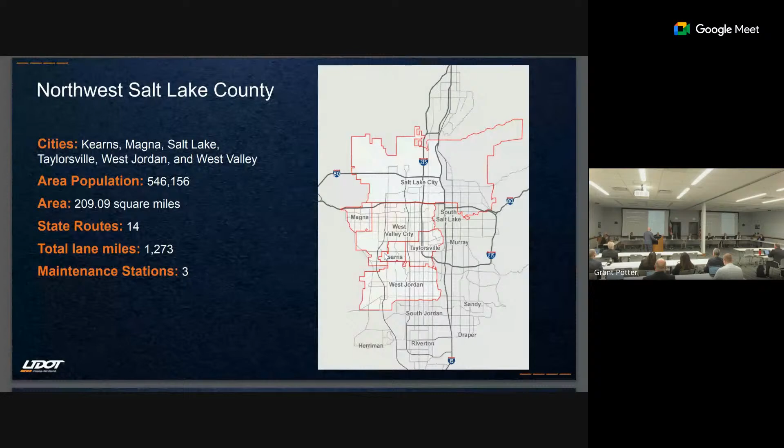These areas drive growth with that towards needing a north-south connection towards the downtown area, which you've heard from West Valley City is why there's emphasis being put on Mountain View Corridor and Bangerter Highway.

I want to talk about some of the things the department's been doing over the last 3 years to try to help facilitate keeping our assets in good condition, as well as improving some of those capacity issues that are in this area.

This project was really important to me because I was receiving quite a few click-and-fixes as a region about some of the challenges our residents have driving through the section. It's also the gateway to our state - when coming out of the airport and coming into Salt Lake, you're passing over all of these bridges that were in a bit of a rough condition at the time.

So the project repaired 19 structures, where those structures had pothole patching, overlay treatments, and joint sealing performed on them. This was completed last year for $9.6 million, and the intent of this was to improve the ride and improve our asset life.

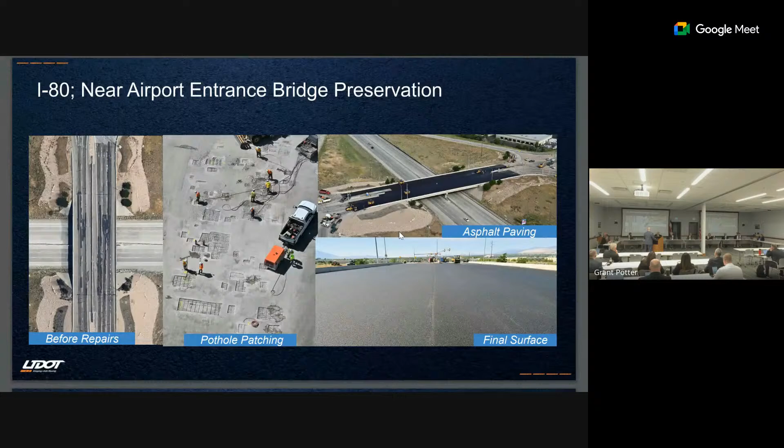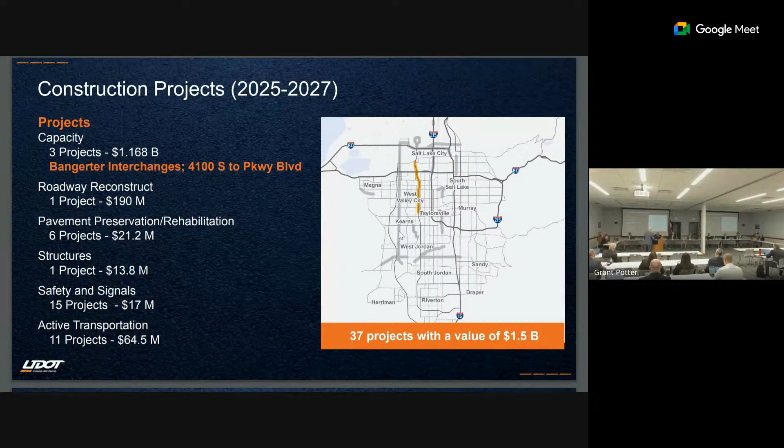The one I want to highlight to you is one of the large capacity projects that are going to be happening. That project is Bangerter Highway interchanges from 41st South to Parkway Boulevard.

So this is the next segment of Bangerter. Yesterday on the tour, we got to see 47th under construction right now. This is that continuation northward of creating that interchange style grade separation, at 41st, 35th, 31st, and Parkway Boulevard. This does have the environmental complete, and they're starting to procure right-of-way for this project as we start getting ready for design and construction in 2027.

The importance of this project, as you heard from West Valley City, is that right now Bangerter Highway can be somewhat of a stop to their east-west connections because of the priority that gets put onto Bangerter Highway. So by separating these facilities, we're going to not only improve traffic and safety along Bangerter Highway, but also improve the east-west connection because more time can be given to those travelers going east-west as mobility also goes north-south. Once completed, this would complete a connection all the way from Parkway Boulevard down to I-15, creating a freeway from that point at free flow.

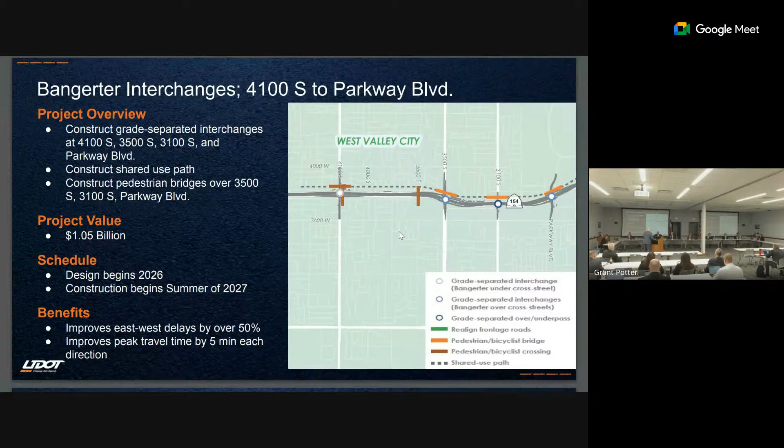But that is just part of the process. There's still more to go on Bangerter Highway - that's just getting us to Parkway, not finishing the whole stretch. So I want to talk about some of the constraints in this area that make it a bit challenging on the network.

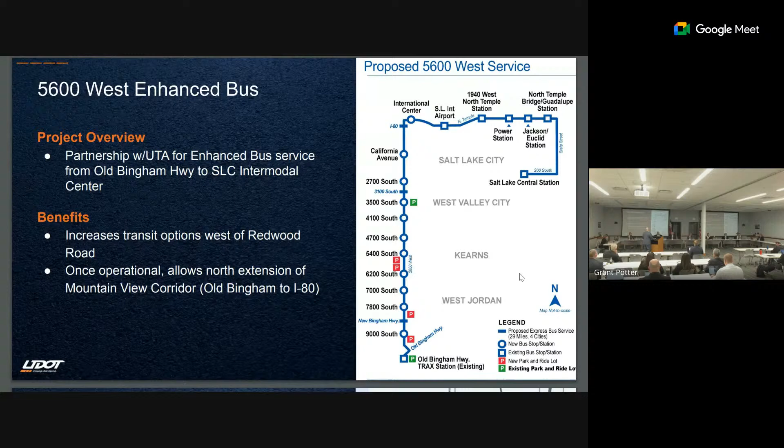Like I said before, West Valley and us see this as a great opportunity to improve safety along the corridor by separating those east-west movements from north-south, allowing free flow for traffic and creating a second ring route besides Bangerter Highway and I-15. The importance to us is trying to find alternatives to I-15. Yesterday was a great example of when something happens on I-15, there aren't a lot of great routes to get around that carry that amount of traffic. So completing Bangerter Highway and Mountain View Corridor becomes even more important to us as a region to help with that mobility.

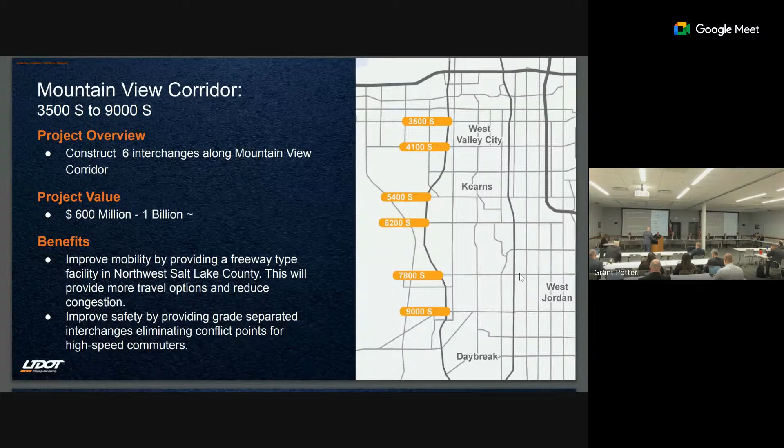So with that, this is what we have planned over the next future needs that we're pushing as a region as our importance. But I also want to let Jeff talk to you guys about what we're doing for planning studies, and what future things we'd like to accomplish. So I'll turn the time over to Jeff.

Good morning, Commissioners. Jeff Dupay, Region 2 Planner.

As part of our tour, we talked about the Northwest Quadrant. We had the Inland Port representatives speak to us about this area. As Kendall mentioned, there are additional connections somewhat competing with each other in the same area. You've got geographical and topographical constraints with the tailings pond on the west. We also have a lot of rail in this same area along with the interstate. There are many transportation connections they're coordinating with our staff on, trying to make this area as viable as possible economically, so it can be productive not only for trucking but also for rail, as well as bringing in those wider body jets to hopefully increase air freight opportunities.

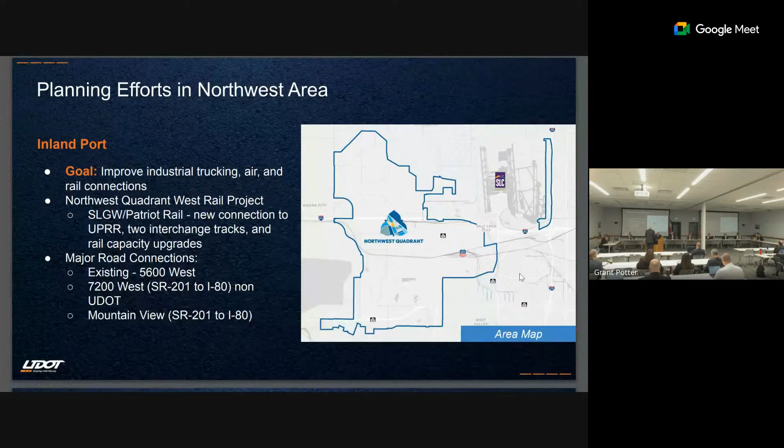One of the other areas just outside the West Valley area is also the Power District that we're working on, a partnership with Wasatch Front Regional Council, Salt Lake City, the Larry Miller Group, and UTA.

One of the challenges we have in Salt Lake County that some other locations don't have as big of a challenge is trying to retrofit various transportation elements within the community. So with redevelopment, we're trying to work together to figure out how we can best utilize or maximize the use of the existing transportation system, to make it more user-friendly, not just to vehicles and rail, but to all users. That includes bikes, additional pedestrian crossings, so that as these areas redevelop they become more assets to the entire community, not just those who may want to or need to interact with those areas.

This is a study currently going on within that Power District area, and we should have that study complete within the next several months. We're anticipating around a July-August timeframe to have some recommendations from that study. In addition, we're also working individually with the communities of West Valley, Magna, and West Jordan on their various active transportation elements, trying to make sure we're incorporating some of those additional connections into our existing transportation network.

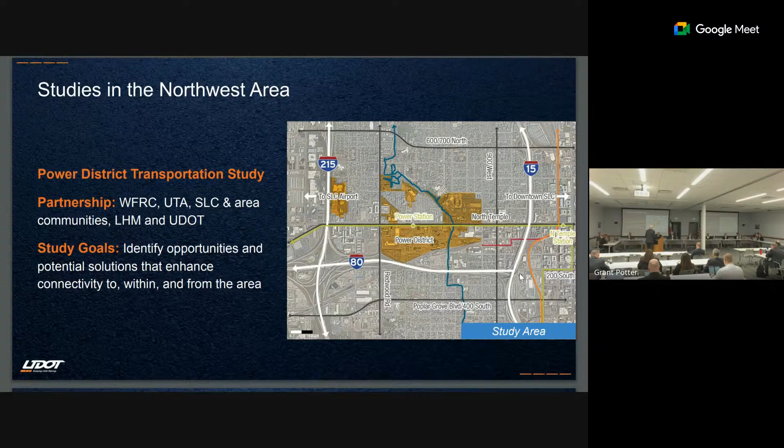And with that, are there any questions?

After the tour yesterday, it was amazing to see how dense and urbanized the western part of the county is, just to see it visually. I looked up the numbers afterwards. Our state is 90% urban, and the urban population takes up only 1.1% of the state's land area. Compared to other states, depending if you include DC, we're the 6th or 7th most urban state in the country. So pretty interesting.

We congregate along these mountains. And Mr. Chair, to Commissioner Gochner's point, our urbanization is increasing much faster than other areas, because only 5 years ago we were number 8th in the country, then we were number 7th. This is the first I've heard we're now number 6 in this area.

Part of it is 65% of this state is owned by the federal government. And when you look at our geography, we have very little land. About 25% actually is available for the public to have businesses and live in. This presents a special challenge for transportation.

Okay. Any other questions? Thank you, Jeff. Thank you.

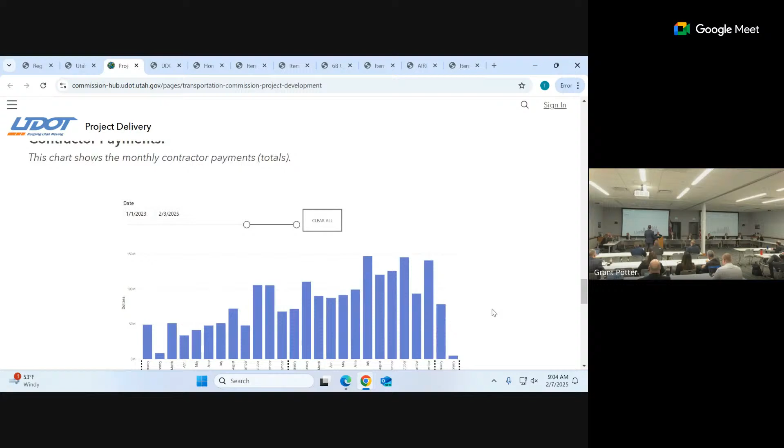And then this is just showing the payments again. You always know that we're going to be low this time of year, but if you look year over year, you can see January to January to January, that number just continues to go up. So consistent with what we know about our program.

It's as big as it's ever been and a lot of work out there. Any questions from me? Josh, can you please go to the first chart? You had the engineer's estimate versus the contractor. This one here, right at the beginning. Know the numbers, go to... let's see... you want this one? Right there.

From the corner of my eyes, I thought I saw the Vineyard project. They had a $4 million discrepancy between the estimate and cost. Where is Vineyard Overpass 7 to 11? And then, so why is that much of a difference? Anyone from Region 3 care to take that? The rest of the projects are all kind of very close, but that particular one is a $4 million discrepancy.

There's a local contribution that's going to be made to make up that difference. They added scope to that project. Okay, sorry, I'm Rob Clayton, I'm the Region 3 Director. Okay, well, thank you, that makes sense.

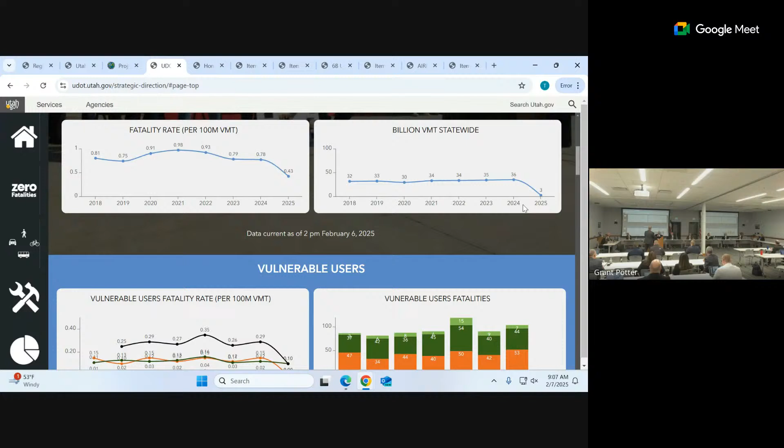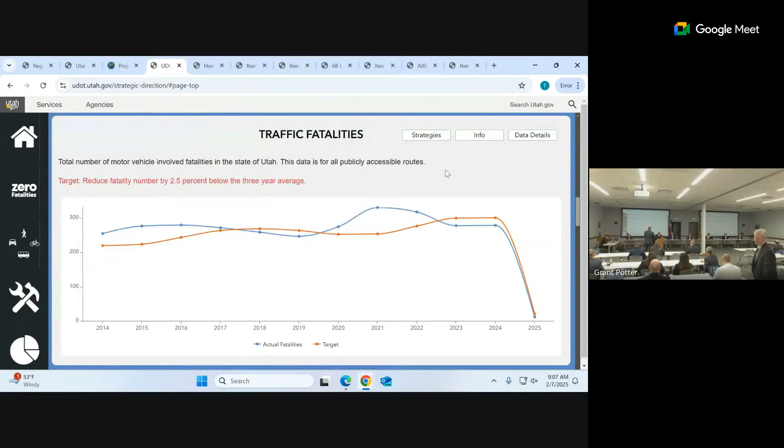Next item, I'll scroll down here just a moment and we'll talk about fatalities. We're currently sitting at 280 that finished out the year of 2024. I want to caution that number, we've reported that there are still a few crash records that we haven't received in terms of needing to get to the death certificates on some of those. So that may drive that number up a little bit or down. There's about 20 or so of those that we're still waiting to come in, but we're pretty confident we're going to be right around that number.

For 2025, we're currently sitting at 13 fatalities for the year, which if you remember this orange line is our reduction target. We use 2.5%, we take 3 prior years, average those, and reduce that by 2.5%. For where we are today, our target reduction is at 22, and you can see we're at 13, so we're about 40-41% below that target, which I would love for that trend to stay throughout the year.

Let me scroll up. As part of that, let me step back on our vulnerable users. There's a new graph here on vulnerable users. You can see that we're tracking - the orange is motorcycles, dark green is pedestrians, and light green is bicyclists. In 2024, we ended up with 53 motorcycle fatalities, 44 pedestrian, and 7 bicyclists, which accounts for about 37% of our total fatalities on the year.

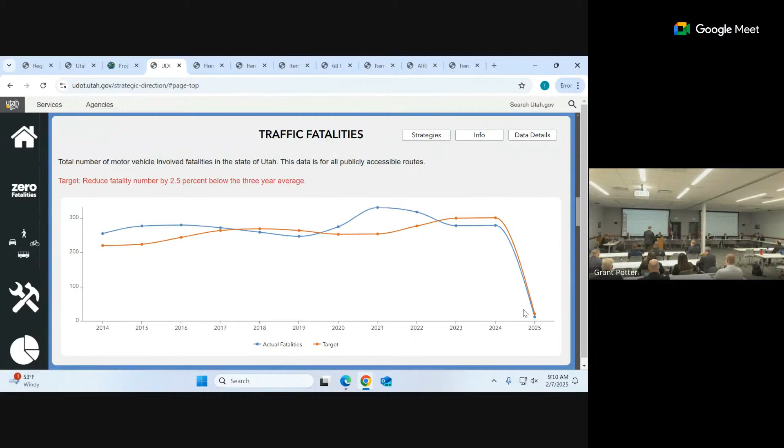Moving along, our suspected serious crashes for the year, we ended at 1,918, which was about 15% higher than our target reduction of 1,663.

I won't report on 2025 because there's a bit of a lag in getting the crash information in on total crashes and suspected serious crashes for the year. We generally trend about 1 to 2 months behind in getting that, so there's really not any data to report on suspected serious traffic injuries and traffic crashes yet.

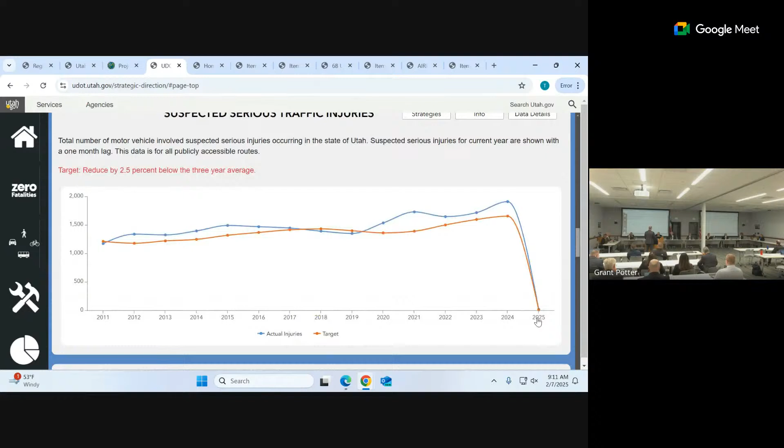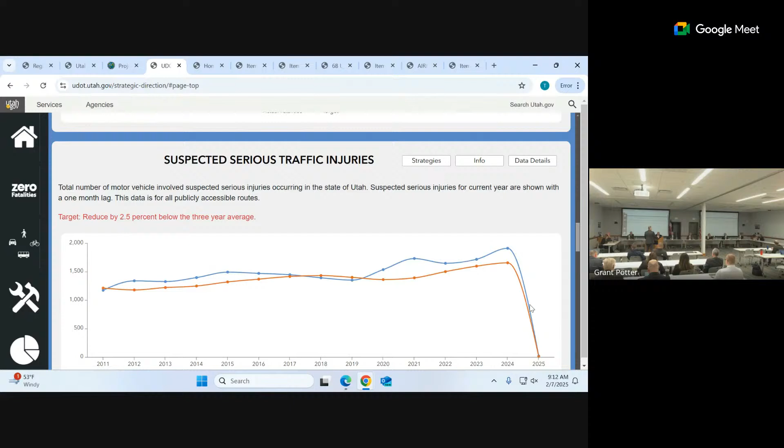I know we have some new individuals on the commission, so let me take a quick second to define what suspected serious traffic injuries are. When there's a serious accident, the police officer at the scene is making his best guess, saying this is a serious crash. The only way we follow up on those is if there's a fatality, so there's a time period where they follow up to find out the severity in which the crash ended up. That's where the classification suspected serious comes from—it's that initial thought process or analysis from the officer doing the investigation.

Total crashes for 2024, over 61,000, which is higher than our target reduction of 58,000.

Let's see, anything else? That does it for my update. But I do always like to remind everyone about the 5 safe driving behaviors: always wear a seatbelt, drive focused, calm, alert, and sober.

Any questions? On the motorcycle deaths, do we have a breakdown of where those occur—urban, rural? Do we separate that out? We have that information, I just don't have it with me today. Okay, because I'm curious, in the summertime we seem to have a lot in our rural areas.

Yeah, we had a spike from June through August on motorcycle fatalities. I forget the exact number during that time period, but it definitely contributed to that higher number through the year. Okay, thank you.

Question, go ahead. I'm new, so I'm asking lots of questions. I believe there's a bill in the legislature right now dealing with—I think most of us have had this experience—where you're stopped and a motorcycle is riding on the yellow line between cars to get up in front of everybody. Are we participating in that, Carlos, in some form? Is that anything we get involved in?

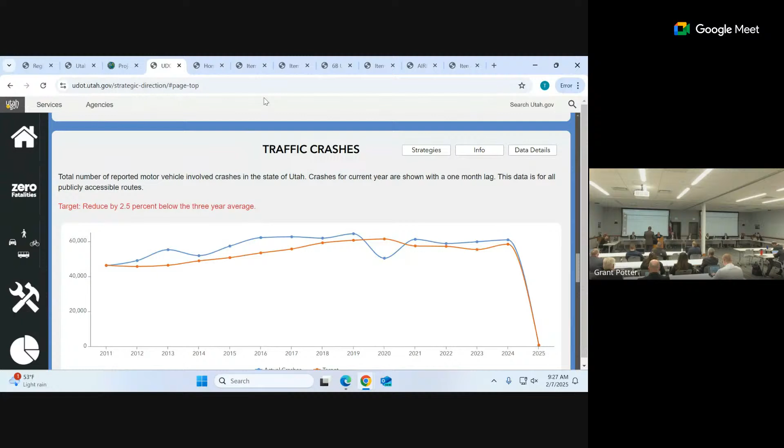Okay, item number 5 is consent agenda, and Ivan is coming to present that. Morning, Commission, Mr. Chair. Thank you, Tessie. Oh, thanks, Grant. Okay, all the way across the room. That's great. Item number 5 is our consent agenda.

Included in the consent agenda packet are the minutes for the December 13th, 2024 Transportation Commission meeting and a list of projects. These projects included in the exhibit have either been awarded, identified to have budget amounts that can be recovered, or are in the closeout process and have funding available to remove and reprogram. So in our packet we have the commission meeting minutes, the report on the December 13th meeting, actions taken, and then our projects returning funding, due to award, budget recovery, and project closeout. Do you see that beautiful $34 million there in savings?

A request today is a motion to approve the consent agenda items as presented. So moved. Thank you. Second. There's a motion and a second. Any questions, comments? Seeing none, all in favor say aye. Aye. Any opposed? Consent agenda is approved.

Thank you. Moving to item 6A. Sorry, yes, Ivan—Mr. Chairman, who was our second on that? Thank you. Our next item, moving to the programming item 6A-1.

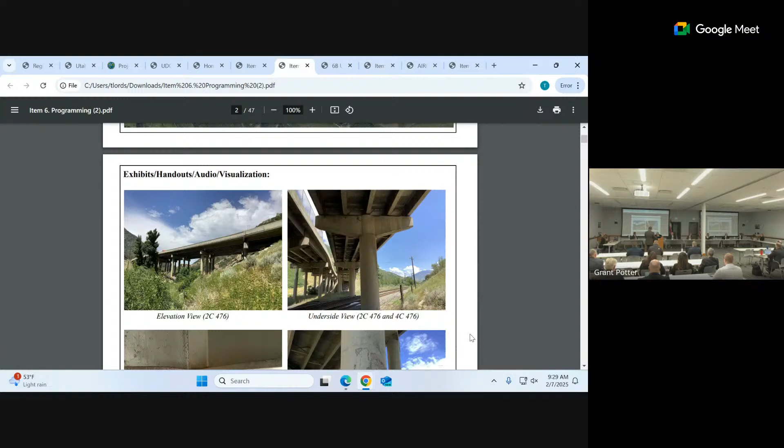Some of the damage seen on the structures. Our request today is a motion to approve adding funds to the I-84 Weber River and UPRR Bridge Replacement Project as detailed.

Thank you, I'll second. There's a motion and a second. Any comments or questions? I was looking forward to maybe just one summer where the Morgan up through Weber County would not have anything going on, but I really know we need these bridges, so I guess I'll wait again next time I go up there. Yeah, I'm excited. Thank you. Well, good.

With that, all in favor say aye. Aye. Any opposed? Item 6A-1 is approved.

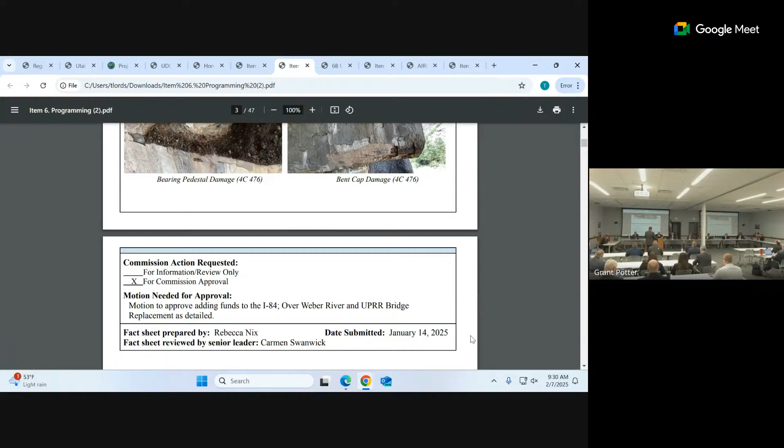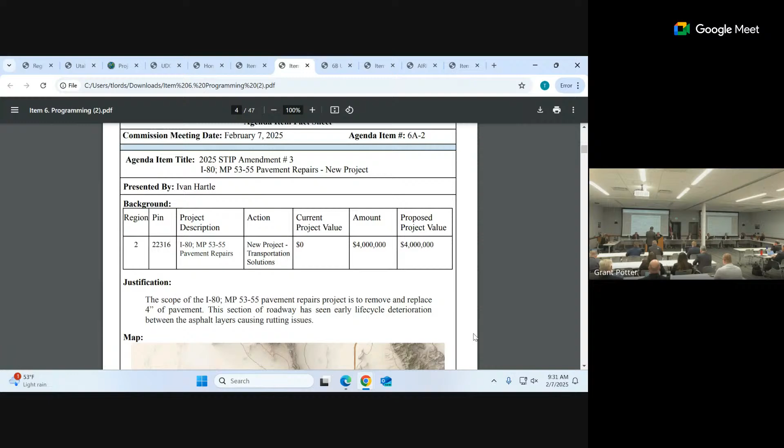6A-2, the I-80 milepost 53 to 55 pavement repairs. This is a new project in Region 2 from our Transportation Solutions program for $4 million. The scope is to remove and replace 4 inches of pavement. This section of roadway has seen early life cycle deterioration between the asphalt layers, causing rutting issues. Located here on our map, I-80, west part of the state.

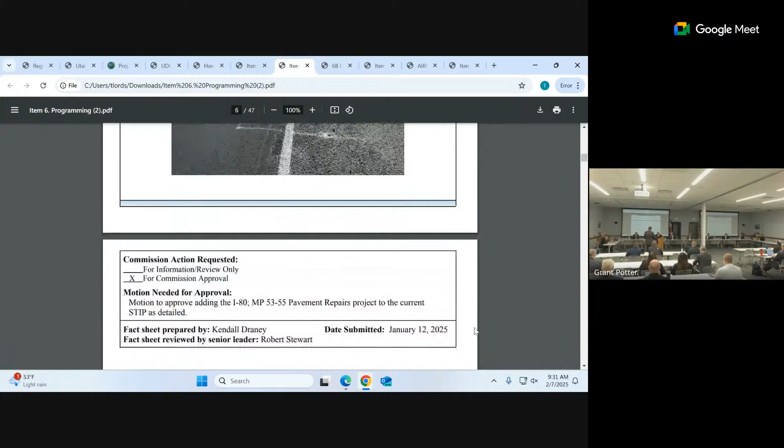Some of the pictures of the asphalt show rutting and separation. Our request today is a motion to approve adding the I-80 milepost 53 to 55 pavement repair project to the current STIP as detailed.

I'll make that motion, but I'd like you to go look at First South by the University of Utah as well. Okay. Second? There's a motion and a second. Any other comments or questions? Seeing none, all in favor say aye. Aye. Any opposed? 6A-2 is approved, thank you.

Next item, 6A-3, the Tooele County Sound Wall Trail, SR 138 to Village Boulevard. This is a scope change and would result in a name change as well, with no funding adjustment. The scope is to build a trail from Village Boulevard to SR 138, which is Pole Canyon Road.

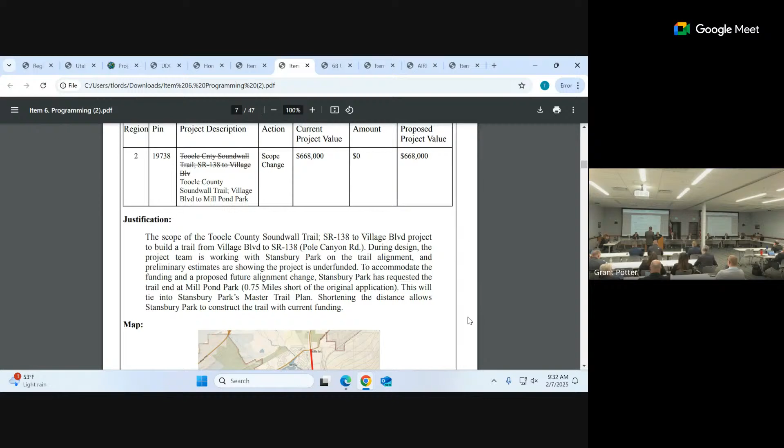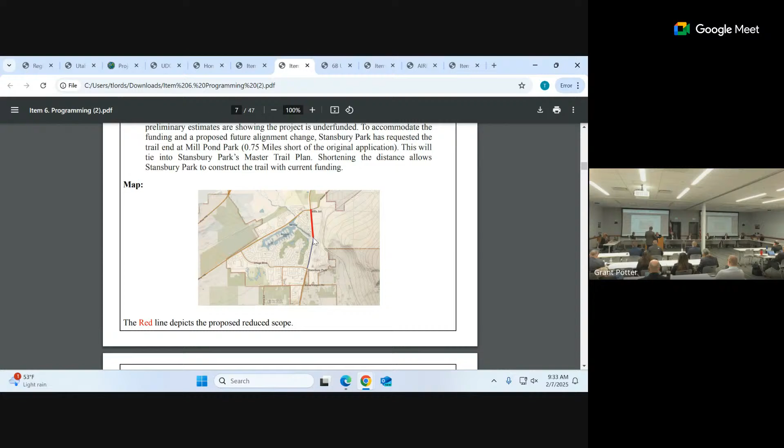During design, the project team is working with Stansbury Park on the trail alignment, and preliminary estimates show the project is underfunded. To accommodate the funding and a proposed future alignment change, Stansbury Park has requested the trail end at Mill Pond Park, about 3/4 of a mile short of the original application. This will tie into Stansbury Park's master trail plan, shortening the distance and allowing construction within the current funding. Located here on our map around Stansbury Park, this red line runs from Stansbury Park to Mill Pond Park Road, where the trail will end. This is the original scope included.

Our request today is a motion to approve adjusting project limits to the Tooele County Sound Wall Trail, Village Boulevard to Mill Pond Park project as detailed.

I'll make that motion. Okay, there's a motion and a second. Other questions or comments? Seeing none, all in favor say aye. Aye. Any opposed? 6A-3 is approved, thank you.

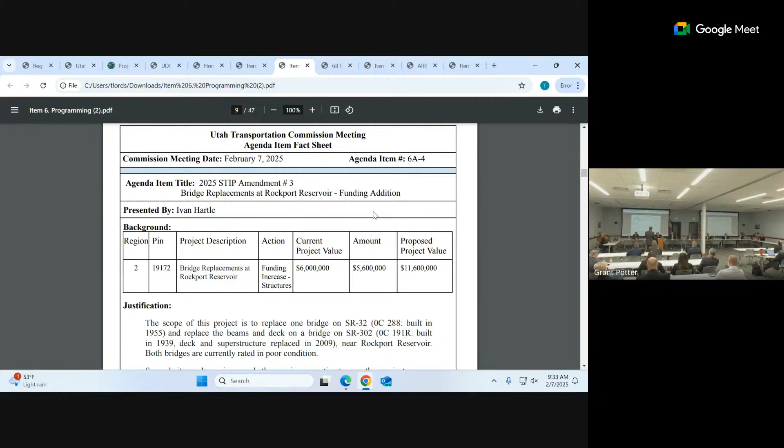Next item, 6A-4, the bridge replacements at Rockport Reservoir, a funding increase from our structures program. The scope is to replace one bridge on SR 32, built in 1955, and replace the beams and deck on the bridge on SR 302, built in 1939.

The deck and superstructure were replaced in 2009. Near Rockport Reservoir, both bridges are currently rated in poor condition. Several items have increased the engineer's estimate on this project scope. Additional funding is requested to address unanticipated utility conflicts, access concerns into Rockport State Park during construction, raising the road profile 5 feet to accommodate high water capacity needs, and changing the foundation type needed for the new bridge. Located here on our map on SR 32 and SR 302 near Rockport Reservoir.

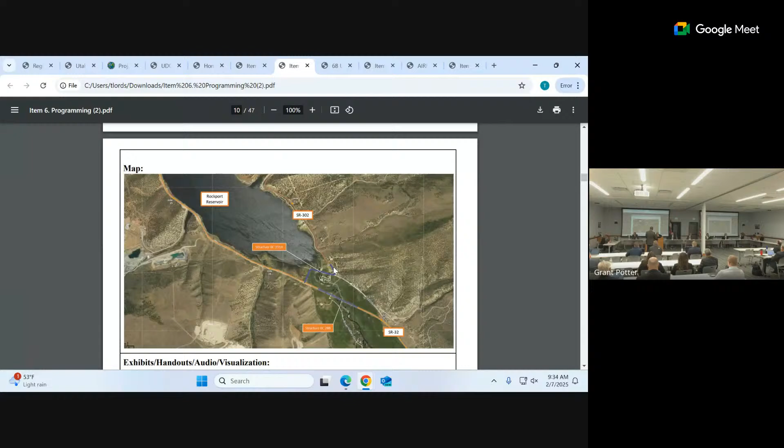Our request today is a motion to approve adding funding to the bridge replacements at Rockport Reservoir project as detailed. So moved. Thank you. Second? There's a motion and a second.

Any comments or questions? All in favor of this project, please say aye. Aye. Any opposed? 6A-4 is approved, thank you.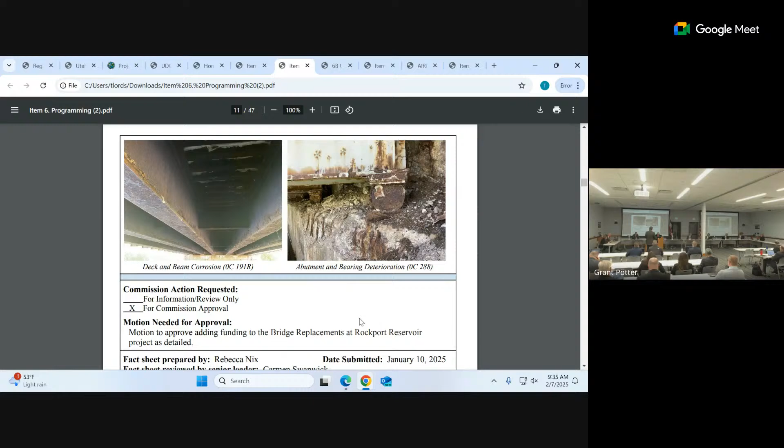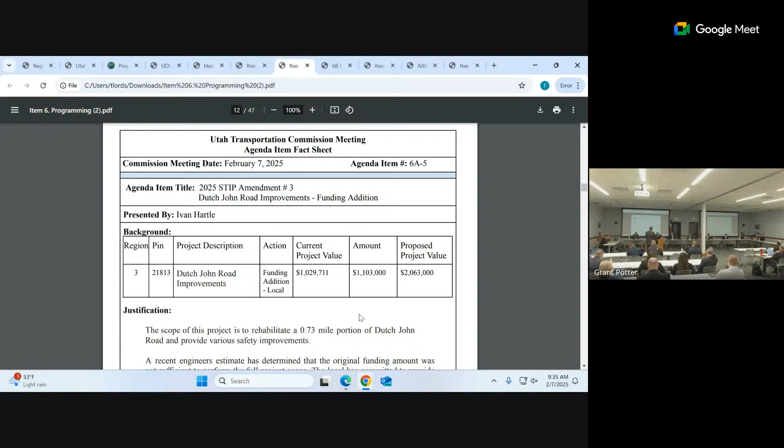Our next item, 6A-5, this is Dutch John Road Improvement, a funding addition from local funds. The scope of this project is to rehabilitate about 3/4 of a mile portion of the Dutch John Road and provide various safety improvements. A recent engineer's estimate determined the original funding amount was not sufficient to perform the full project scope. The local agency is committed to providing additional funding and is requesting approval to increase the project value. Located here on our map in Dutch John, near Flaming Gorge.

Additionally, as part of our packet, we have a letter from the town of Dutch John committing to that funding increase. Our request today is a motion to approve adding local funds to the Dutch John Road Improvement Project as detailed. I'll make a motion to approve.

Thank you, second. This is a road inside Dutch John itself, right? In the town, yes. Is it the one that connects to go down to the little hole? I do not know what it looks like.

Yes, Rob. Good morning, Rob Clayton. I believe you're correct, Commissioner. This is a mill and overlay project that the town has funded itself and just needed a little bit of extra funding to do what they intended to do, and they added a little bit to it. This is that main loop up around the back part of town. Yeah, it just goes, yes.

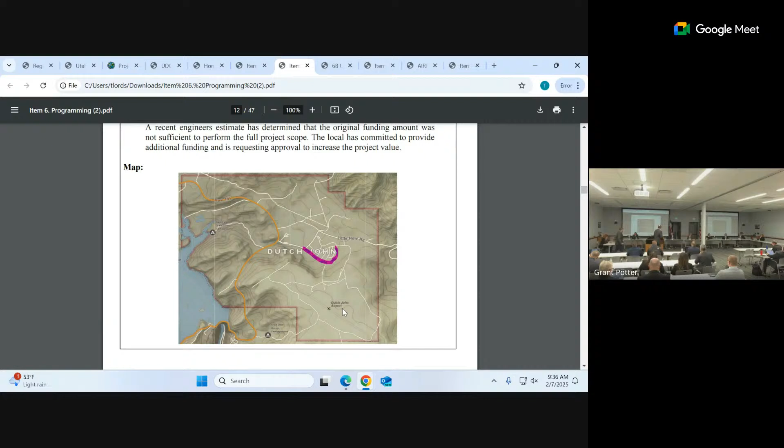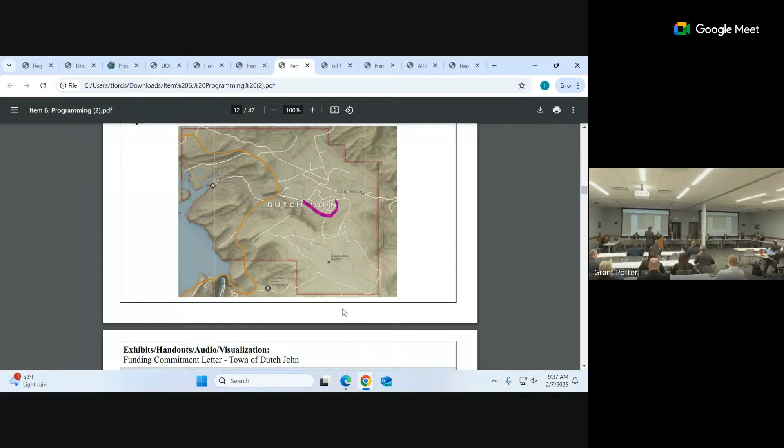For those of you who missed me yesterday, I was there in CIB to get this money appropriated for Dutch John, and also number 7 that you're going to see in the agenda. So it's coming from CIB. Thank you.

So we have a motion and a second. Any other questions, comments? Seeing none, all in favor say aye. Aye. Any opposed? Item 6A-5 is approved.

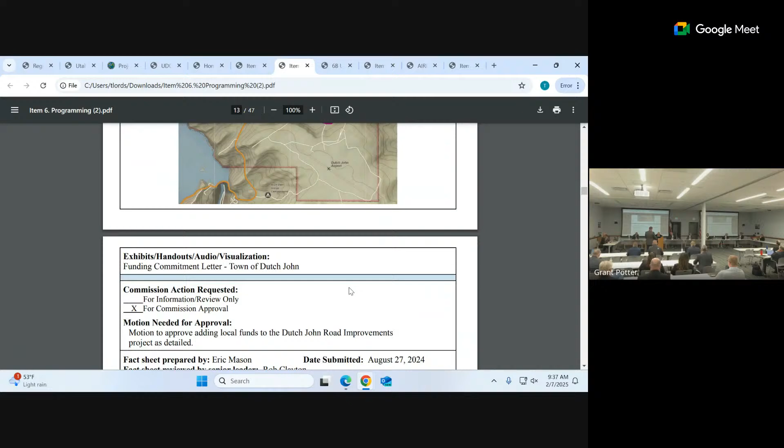Thank you. Our next item, 6A-6, is the I-15 Bridge Rehabilitation west of Levan. This is a funding addition and scope change from our Structures and Transportation Solutions program in Region 3. The scope of this project is to replace 2 bridges and repair 8 others to extend the life of I-15 west of Levan in Juab County.

These bridges were all constructed in 1984. The project is 11.6 miles long, located between milepost 210 and 222. The project will also repair the associated wing walls, abutments, parapets, and outdated safety hardware to meet current UDOT standards. The additional funding will be used to cover more extensive traffic control than was originally anticipated, including crossovers to be less impactful to I-15 traffic.

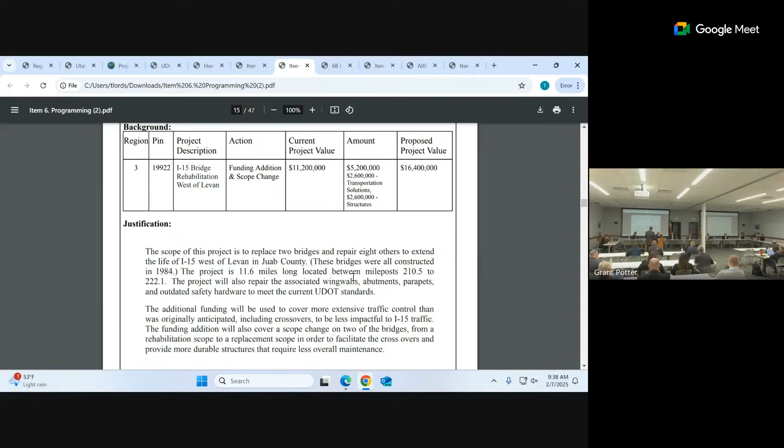The funding addition will also cover a scope change on 2 of the bridges from a rehabilitation scope to a replacement scope, in order to facilitate the crossovers and provide more durable structures that require less overall maintenance. They're located here on our map showing the structures along I-15 west of Levan, as well as pictures of the bridges themselves.

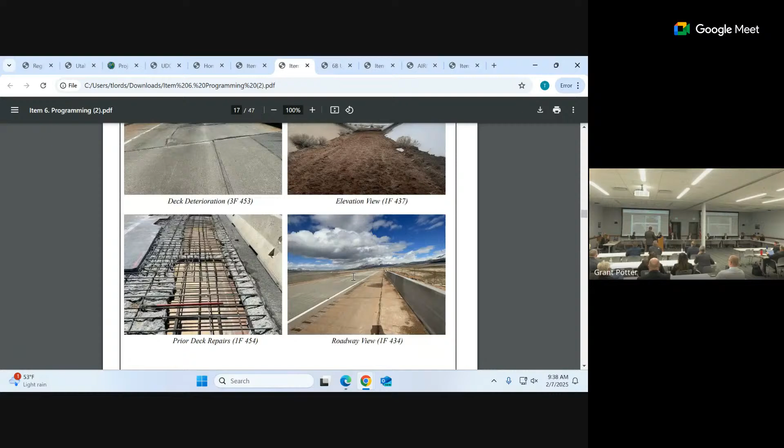Our request today is a motion to approve adding funding to the I-15 Bridge Rehabilitation west of Levan project as detailed. So moved. Thank you. Second. There's a motion and a second. I have a question. Maybe Becky can answer this.

So we had a bridge over the Rockport Reservoir built in 1955, and this one is 1984. What happens? That one lasted this long, and this one is just giving up. Any particular reason why this bridge is going so quick?

So this one was originally scoped out to just be a deck replacement on the bridge. In order to widen out the bridge and give enough room to provide the crossovers and allow traffic to maintain 2 lanes in each direction, we're replacing it with a smaller plate pipe structure. So the cost of replacement is just slightly higher than what the deck replacement would be, and it gives us a chance to have a lower maintenance structure in place.

So it's not necessarily condition driven that we're doing this replacement. Okay, it's condition of the deck, but more to facilitate the MOT and also reduce future maintenance. Okay, that makes sense. Thank you. Right, thank you.

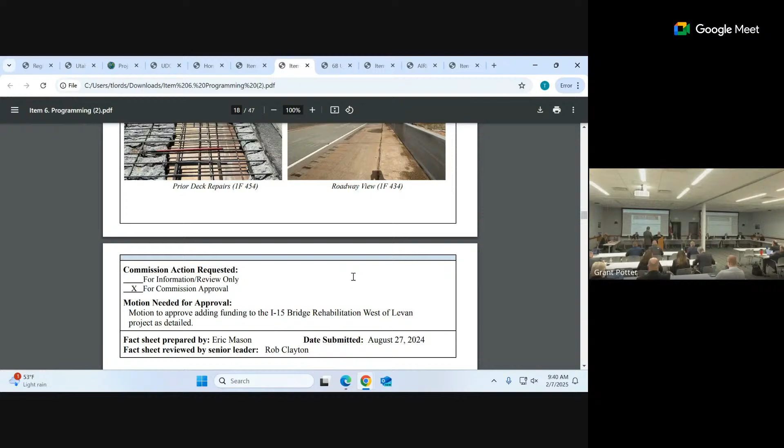Thank you. Our next item, 6A-7, this is the Myton Main Street. Also local funding being requested to add. The scope of this project is to rehabilitate the pavement on Myton Main Street. A recent engineer's estimate determined that the original funding amount was not sufficient to perform the full project scope.

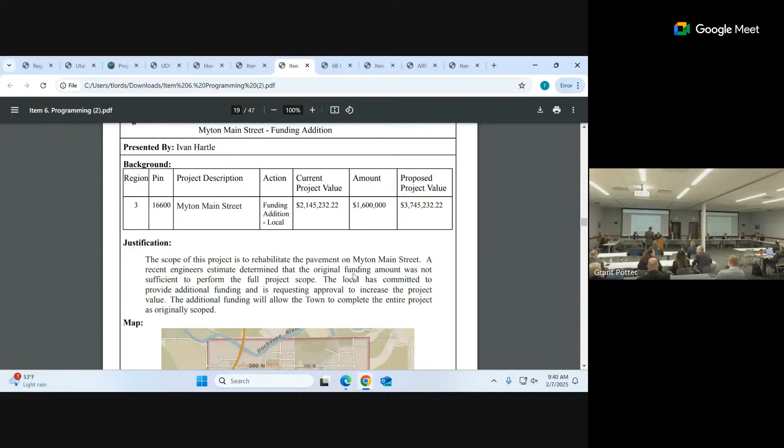The local is committed to provide additional funding and is requesting approval to increase the project value. The additional funding will allow the town to complete the entire project as originally scoped. So located here, town of Myton on Main Street.

Included in the packet is a letter from Myton committing to the funding they received through the CIB to add to this project. The request today is a motion to approve adding local funds to the Myton Main Street project as detailed.

Mr. Chairman, I move to approve. I'll second. There's a motion and a second. Any comment, questions? Seeing none, all in favor say aye. Aye. Any opposed? Item 6A-7 is approved. Thank you.

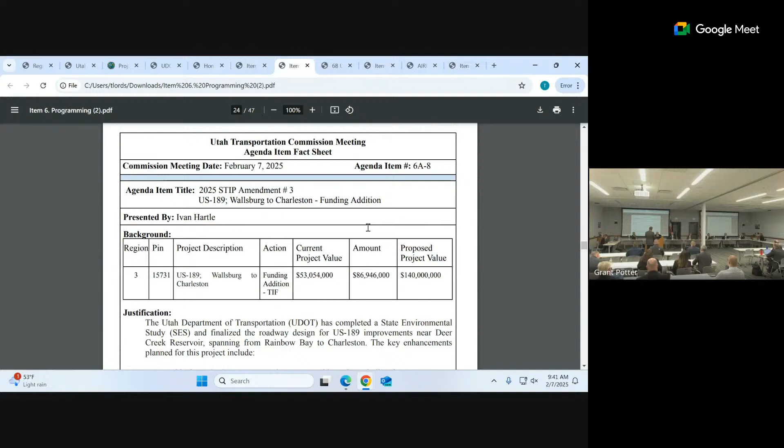Our next item, 6A-8, located on US 189, Wallsburg to Charleston. This is a funding addition from our TIF program. The Utah Department of Transportation has completed a state environmental study and finalized a roadway design for US 189 improvements near Deer Creek Reservoir, spanning from Rainbow Bay to Charleston.

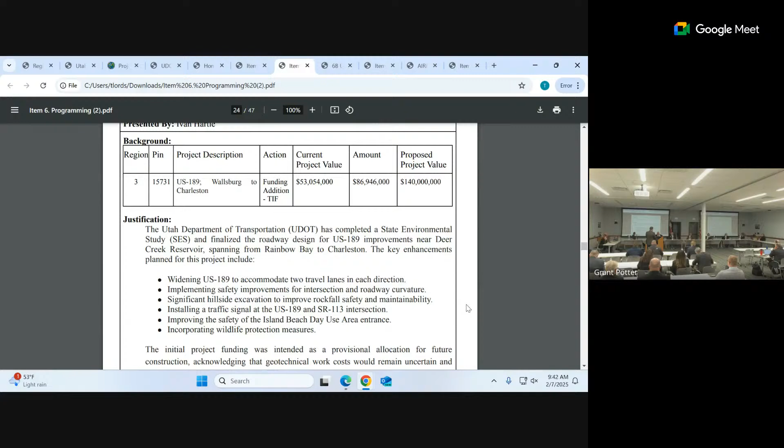The key enhancements planned for this project include widening US 189 to accommodate two travel lanes in each direction, implementing safety improvements for intersection and roadway curvature, significant hillside excavation to improve rockfall safety and maintainability, installing a traffic signal at the US 189 and SR 113 intersection, improving the safety of the Island Beach day use area entrance, and incorporating wildlife protection measures. The initial project funding was intended as a provisional allocation for future construction, acknowledging that geotechnical work costs would remain uncertain and impractical to estimate until the environmental review was completed and the alignment finished and finalized.

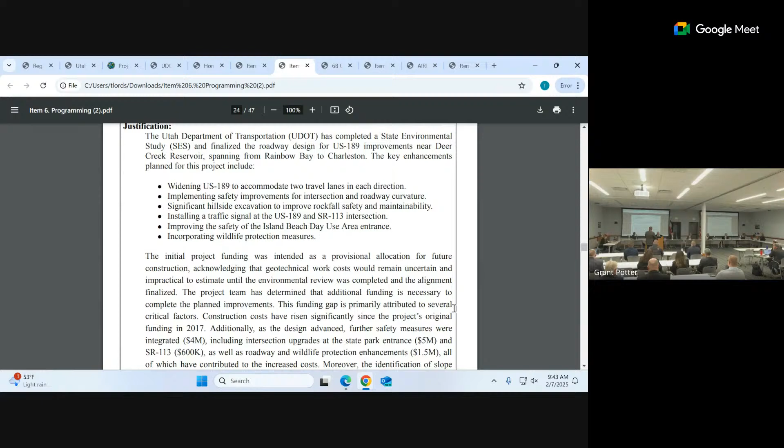The project team has determined the additional funding is necessary to complete the planned improvements. This funding gap is primarily attributed to several critical factors, including construction costs rising significantly since the project's original funding in 2017. Additionally, as the design advanced, further safety measures were integrated, approximately $4 million, including intersection upgrades at the state park entrance, which is $5 million, and SR 113, $600,000, as well as roadway and wildlife protection enhancements of about $1.5 million, all of which have contributed to these increased costs.

Moreover, the identification of slope stability issues during the design phase required slope treatment work, a little over $10 million, and the replacement of a bin wall, $500,000, further escalating the project's overall expenses.

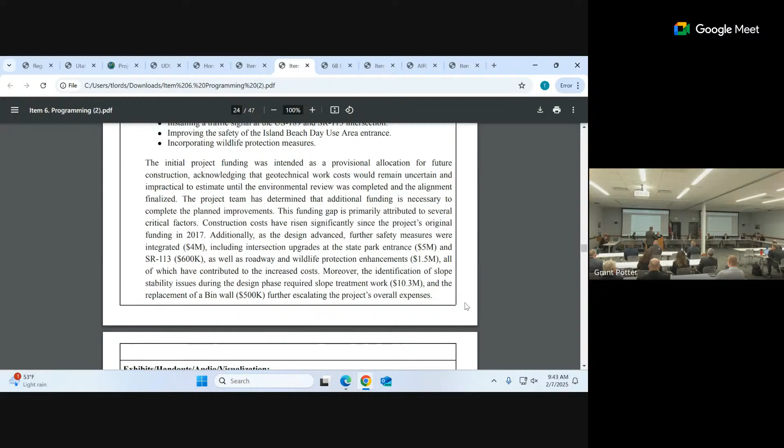Mr. Chair, I have a question. This is one of the things I've spoken about before, and I hate to be a broken record, but this is one we've approved the initial phase of. So we've already approved this once. Now we're coming back for additional funds to complete other aspects of this particular road. Why didn't we have all that information before we asked the first time, and get it close?

Because this is like a major addition, and having some experience in this, I see sometimes we get something out there, and it's almost like phasing on a building or planning a building, and then it kind of screws us into the next time - we have to do the rest of this building, even though we might have known it was going to include this in the previous estimation. I'm concerned sometimes we have to look at it to make sure that's not what's happening here. This one just confuses me a little bit on what we're doing.

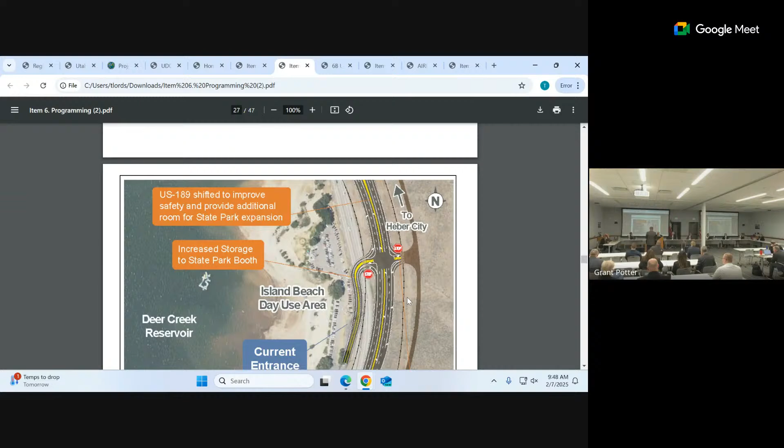Absolutely. And then we spent quite a bit of time working with state parks on the access to Deer Creek here. The day use has increased significantly through this area. It's a busy campground, busy recreation area. So we're trying to find a way to deliver a safe entrance and exit, because they're looking at options of actually increasing the state park on the other side of the road as well, so we needed to preserve that option. I won't say what I was thinking. I wish I had that discipline. Thank you.

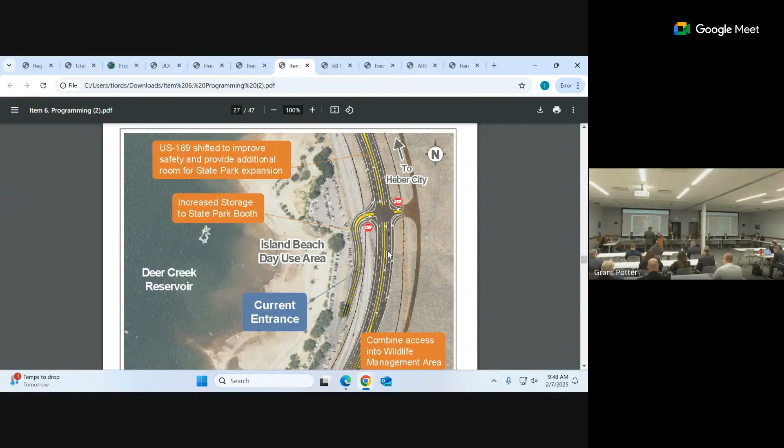So on that, here was some of the project map showing the wildlife access, the increase, or the proposed change to the island beach day use area. Our request today is a motion to approve adding funds to the US 189 Wallsburg to Charleston project as detailed. So moved. Motion and a second. Any other questions or comments? Seeing none, all in favor say aye. Aye. Any opposed? 6A-8 is approved. Thank you.

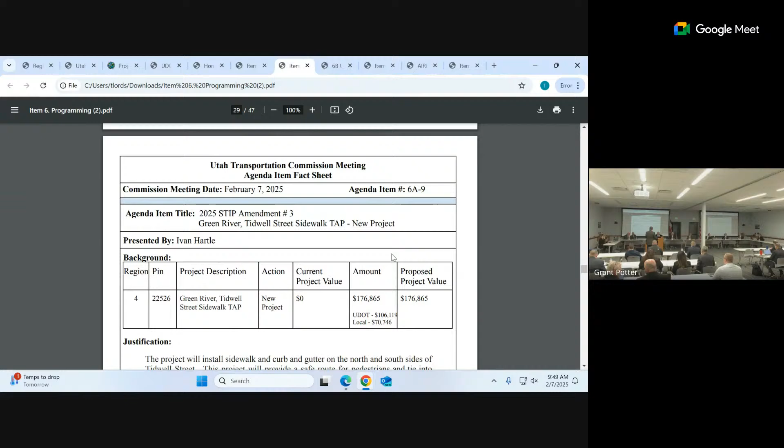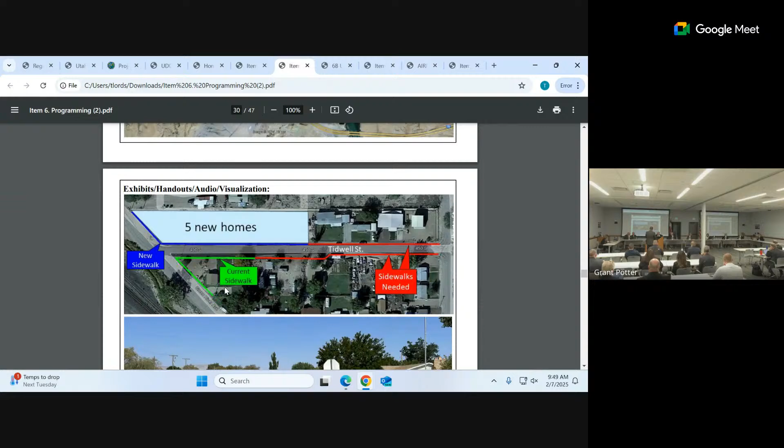Our next item, 6A-9, this is a new project in Green River from our Transportation Alternatives Program in Region 4. This project will install sidewalk and curb and gutter on the north and south sides of Tidwell Street, providing a safe route for pedestrians and tying into existing sidewalks in the area. Located here on the map in Green River, and then we have a zoom-in section of Tidwell Street. There's new sidewalk going in with the development. You can see where there's current sidewalk already installed at the corner, and then the sidewalks to be installed are shown in red here.

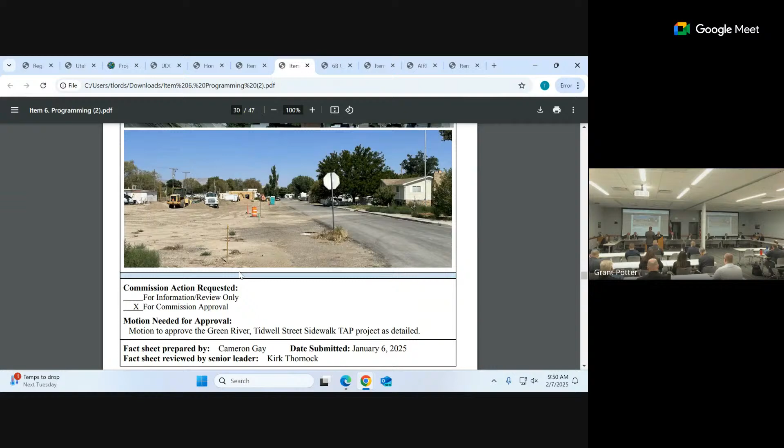Our request today is a motion to approve the Green River Tidwell Street Sidewalk TAP Project as detailed. I'll make that motion. I'll second it. It's a motion and a second. Any questions or comments? Seeing none, all in favor say aye. Aye. Any opposed? Item 6A-9 is approved.

Item 6A-10 is a funding addition from our Transportation Investment Fund on the Northern Corridor in Washington County. Recent decisions by federal government agencies, the BLM and U.S. Fish and Wildlife Services, have stopped the Northern Corridor project from moving forward. Legal representation and additional engineering expertise are needed to pursue reissuance of the UDOT road right-of-way alignment for the Northern Corridor. The additional funding will be used to cover expenses incurred by legal counsel, design, environmental work, and potential public involvement.

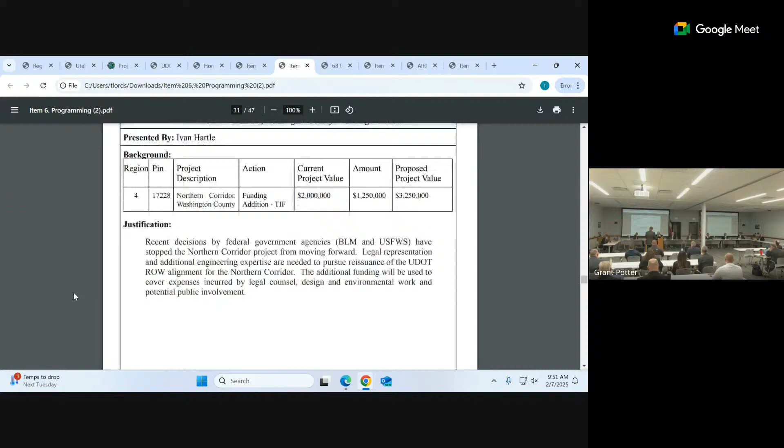Our request today is a motion to approve adding funding to the Northern Corridor Washington County project as detailed. So moved. Thank you. Second. It's a motion and a second.

6A11, the SR 14 milepost 12.5 to 17.2 overlay is a funding addition and scope change. The scope of the SR 14 project is from the Transportation Solutions Program in Region 4.

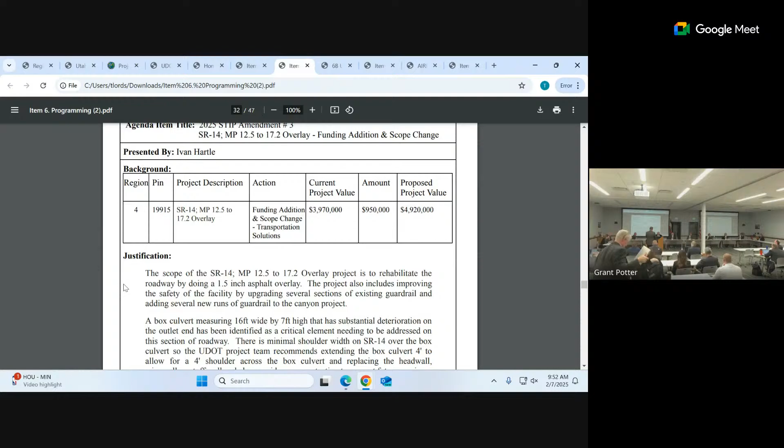The scope of the SR 14 milepost 12.5 to 17.2 overlay project is to rehabilitate the roadway with a 1.5 inch asphalt overlay. The project also includes improving safety by upgrading several sections of existing guardrail and adding several new runs of guardrail to the canyon project.

A box culvert measuring 16 feet wide by 7 feet high, with substantial deterioration on the outlet end, has been identified as a critical element needing to be addressed on this section of roadway.

There's minimal shoulder width on SR 14 over the box culvert. So the UDOT project team recommends extending the box culvert 4 feet to allow for a 4-foot shoulder across it, and replacing the head wall, wing walls, and cutoff walls, as well as providing scour protection to prevent future erosion. Located here on our map...

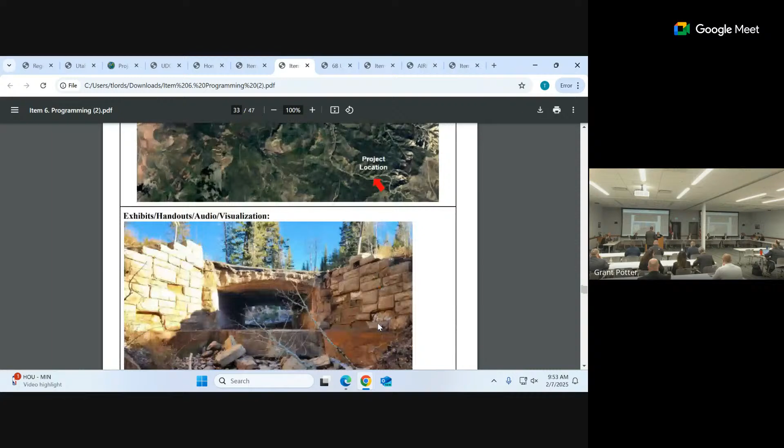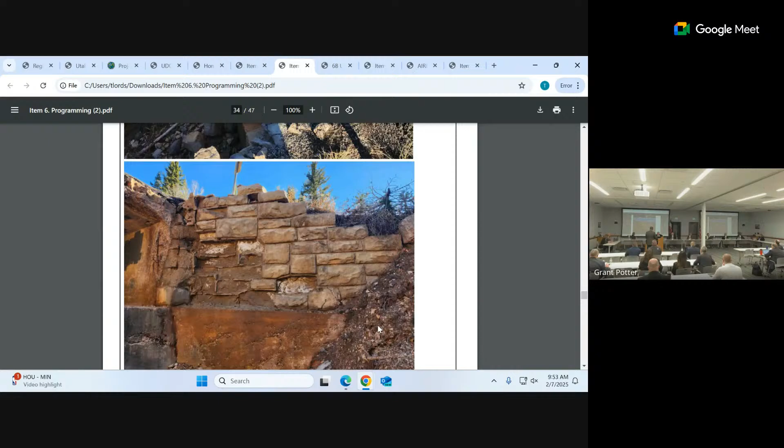Our request today is a motion to approve the SR 14 milepost 12.5 to 17.2 overlay funding addition and scope changes as detailed. I'll make that motion.

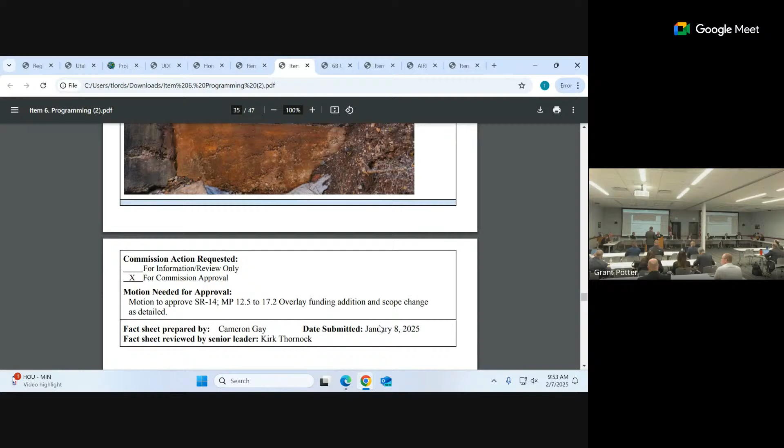Thank you. So motion and a second. Any questions, comments? Seeing none, all in favor say aye. Aye. Aye. Any opposed? Item 6A-11 is approved. Thank you.

6A12, SR 18 St. George Boulevard to Main Street, and SR 34 funding addition and scope change, coming from our Transportation Investment Fund as well as some St. George City funding.

The scope of the SR 18 St. George Boulevard to Main Street and SR 34 project includes widening to a 7-lane section from Tabernacle to 100 South, and an asphalt rehabilitation of the 5-lane section from 100 South to Main Street, with several new right turn and dual left turn pockets at key intersections.

The project includes a new storm drainage system, soil nail walls, retaining walls, and access control elements. Traffic modeling shows a 7-lane facility is needed from 100 South to Main Street around the year 2040.

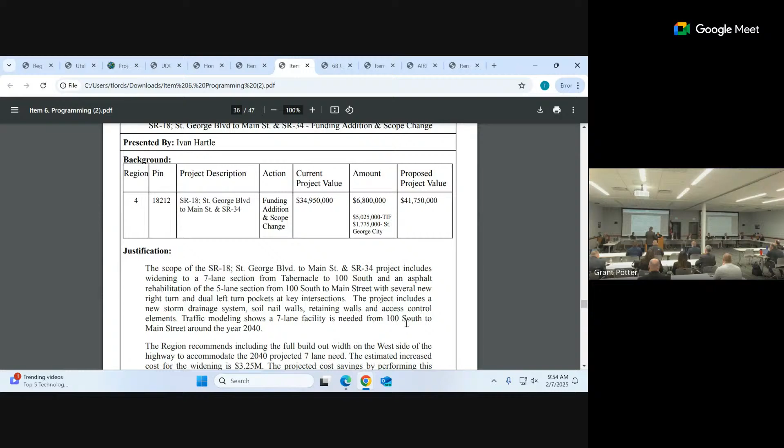The region recommends the full build-out width on the west side of the highway to accommodate the 2040 projected 7-lane need. The estimated increased cost for the widening is $3.25 million. The project cost savings by performing this work with the current project is estimated at about $8 million.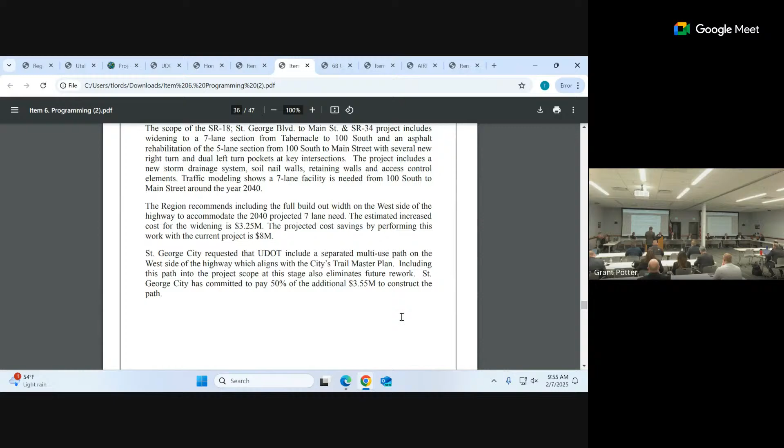St. George City requested UDOT include a separated multi-use path on the west side of the highway, which aligns to the city's trail master plan. Including this path in the project scope at this stage also eliminates future rework. St. George City has committed to pay 50% of the additional $3.55 million to construct that path.

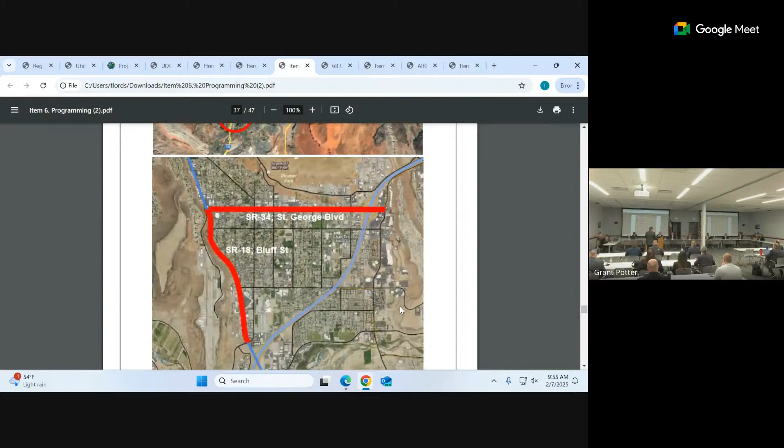So located here on our map, located here, is the area, another picture of the area to be worked.

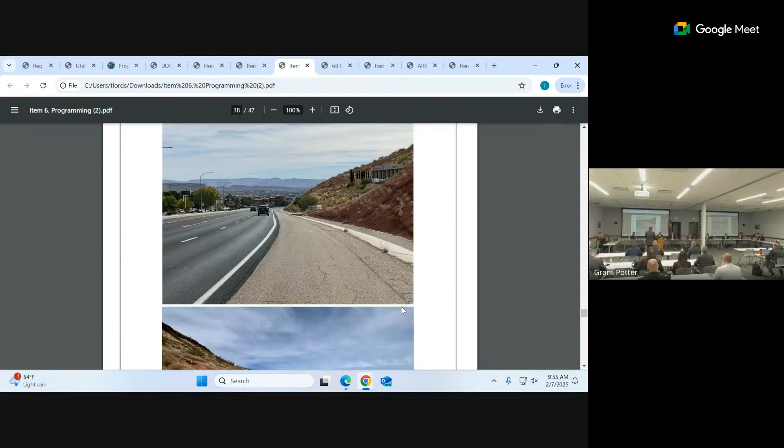Our request today is a motion to approve the SR 18 St. George Boulevard to Main Street funding addition and scope change as detailed.

I'll make a motion. Thank you. I'd second. There's a motion and a second. Any comment? Questions? Do we have any from Region 4? Do you have any comments, additions, new information? Okay.

Thank you. Yeah, the city is cooperating to do some bike paths on that region area, so. I just want to emphasize the 7-lane in St. George. Yeah.

Indeed, it's growing. So all in favor of this project, please say aye. Aye. Aye. Any opposed? Item 6A-12 is approved. Thank you.

Also attached is the letter from St. George City committing to their portion of the funding.

Our next item, 6A-13, is an informational only item of Riverfront Parkway, 11050 South to 11400 South, a widening project for Wasatch Front Regional Council and local government. This is a local government project with South Jordan City. The scope of the project is to widen the roadway to 2 lanes each direction and add on-street parking.

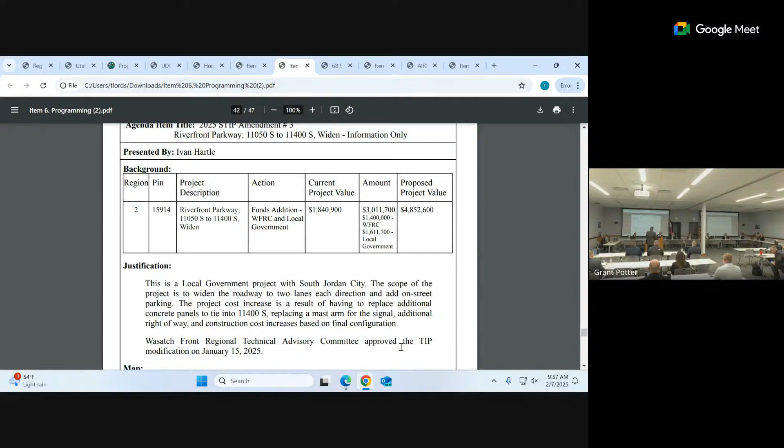This project cost increase is a result of having to replace additional concrete panels to tie into 11400 South, replacing a mast arm for the signal, additional right-of-way, and construction cost increases based on the final configuration. The Wasatch Front Regional Technical Advisory Committee approved this TIP modification in their January 15, 2025 meeting.

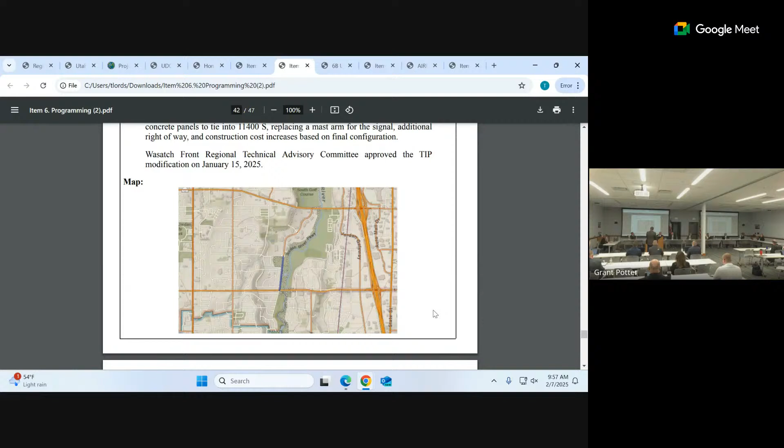So located here on our map, and there's no motion requested on this item.

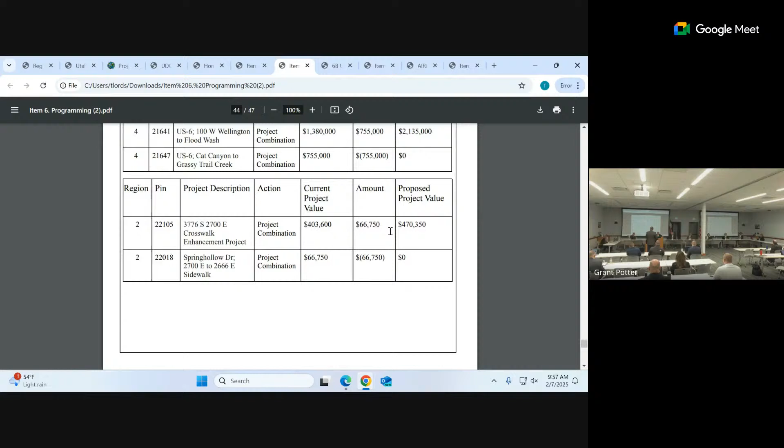Next item is project combinations. We have 2 project combinations in Region 4 and 1 project combination in Region 2. These individual projects have previously been approved through commission action. Project combinations are done to provide efficiencies in project delivery, and no action is required.

And then we have item 6B that we're going to move to.

Good morning, Commissioners. I'm Andrea Olson, the Planning Director at UDOT. This agenda item is to finalize the input lists for transit and for highway for the capacity project prioritization process.

As a reminder, on an annual basis, we go through and add any eligible projects that have been amended by any planning entity into phase 1 of their respective plans. We add those to the input list for transit and for highway. But as part of that process, the commission has the ability to add any projects that have been identified as a phase 1 need.

We had a great discussion yesterday at staff update. The discussion centered around 3 transit projects to be added, and then 4 highway projects to be added. And since then, I've become aware of another project that Commissioner Menlove would like to add to the list. I don't know, Commissioner, if you want to say anything. I don't mean to put you on the spot, but it is detailed in the fact sheet.

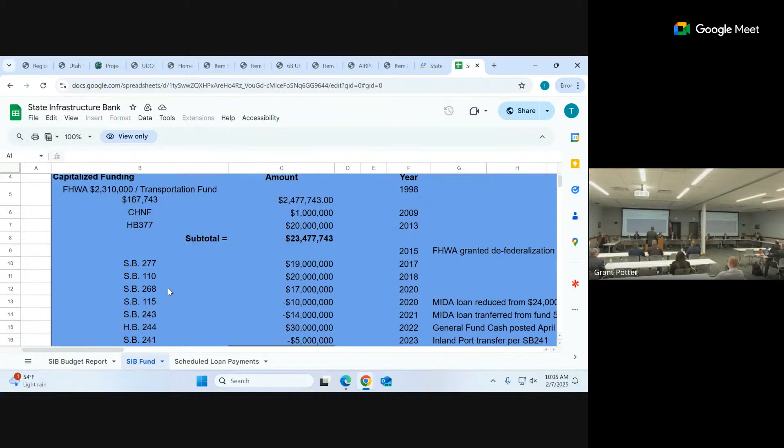On this same tab, as we scroll down, we can see what active loans we currently have out there, the years requested, the term, the rate, and the requested amount, and then completed loans below that. Does that give you any more comfort?

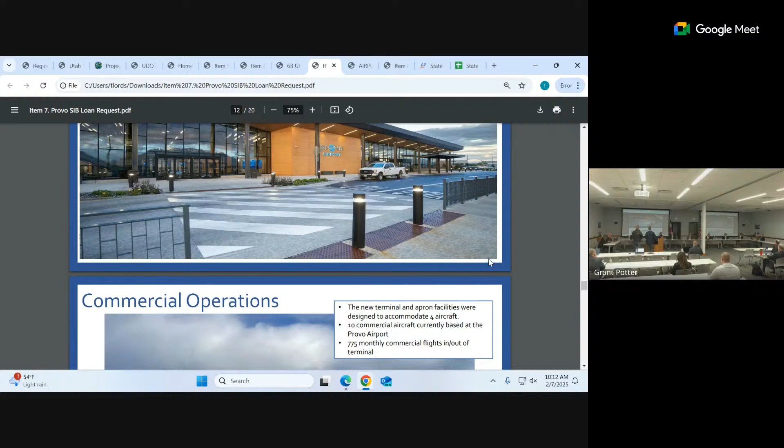So we'd like to give the commission some background on the ask, on what's happening at Provo, and the reason why we're here today. First of all, for those maybe not privy to the information, we opened a new passenger terminal in July of 2022. Prior to this date, we were operating out of a one-gate terminal in the middle of the airfield. This new terminal has 4 passenger gates and has allowed a lot of growth to happen at the airport.

So this facility was designed to accommodate 4 aircraft on the apron. You can see in this picture, this was the first winter after opening. We have 6 aircraft parked there. Since this picture was taken, we've actually announced service from American Airlines, and we'll have an additional 1 or 2 aircraft parked overnight, every night, out here in front of the terminal, in addition to 2 more aircraft on the airfield that are parked farther away from the terminal, just because we're out of space at the terminal site.

You'll see here, right now we have approximately 775 monthly commercial flights in and out of the airport. I'd like to spend just a little bit of time on this slide so you can see our annual enplanement. An enplanement is a passenger getting on a plane in Provo, so roughly double that would be our passenger throughput each year. Prior to our terminal opening, we were hovering around that 100,000 enplanement mark.

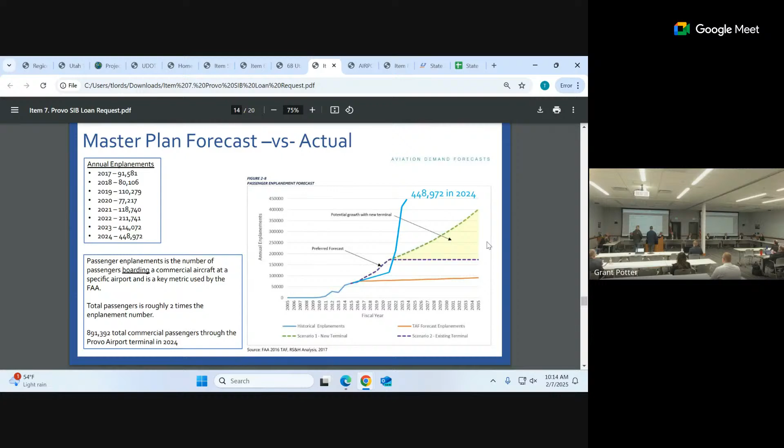Since the terminal opened, and I guess this graph probably explains it better than the numbers themselves, this blue line is our actual enplanement number. The background to that line is the FAA forecast and master plan of what we expected to see at the terminal, this green line. So we hit our projections within the first 2 years of opening, and we're roughly 12 years ahead of schedule there. So really just seeing explosive growth and demand to travel out of Provo.

We've also taken a look at the economic impact of what these flights and this commercial service is doing for the area in general. I won't dive too much into this, but you can see these big numbers at the end: over $200 million in annual economic impact generated by these commercial flights, and just shy of $3 million in tax impact as a direct result of this commercial service.

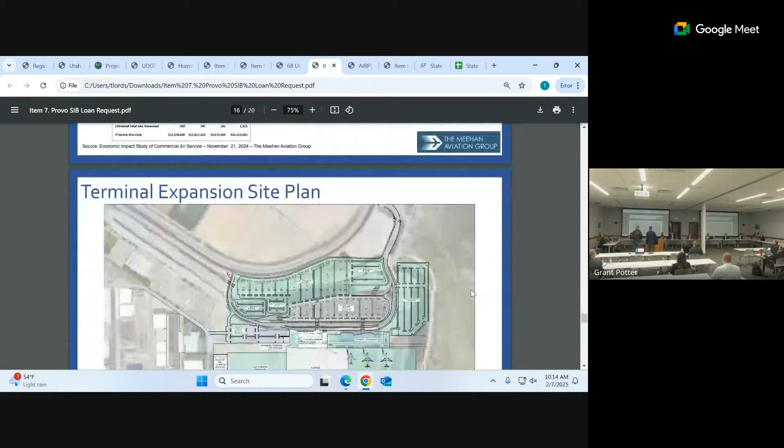So with that, we're looking at expanding the facility. The first part of this expansion will be to increase the size of our apron. Right now, this is the current apron size, and this is our current terminal building. We'd be looking to pave all of this, roughly tripling the size of our apron, and in addition, add more passenger gates to get to a total of 10 passenger gates and opportunity for 10 aircraft as well.

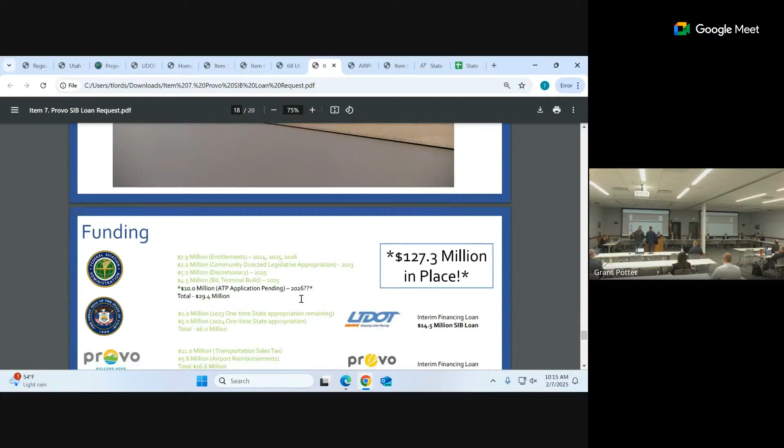Here's an expansion rendering. As mentioned previously, we've got a large chunk of money in place. Our struggle right now is that a lot of this money is available at different times, which is why we're coming to the commission for the loan. We'd like to accelerate the construction of that apron as soon as possible, which is what the loan would allow us to do — to actually get started this summer and have pavement in place by this winter.

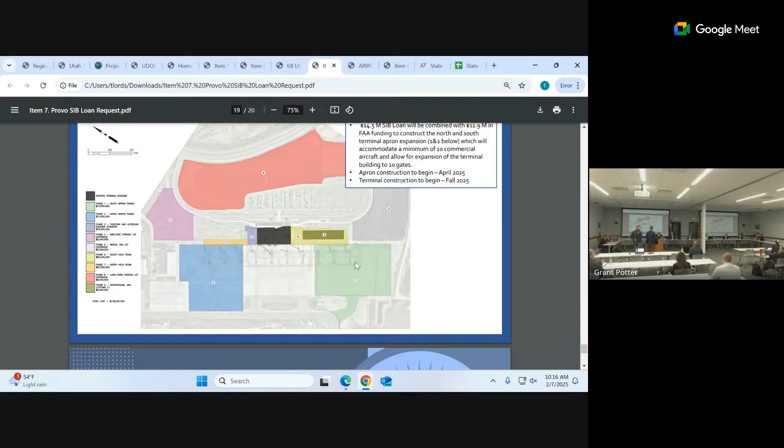Just one more figure here. So I mentioned that this apron would be the ask for this project. This has already been surcharged — the dirt work already took place last year. So this project is ready to immediately strip that surcharge away and begin paving. That would be the use for the loan.

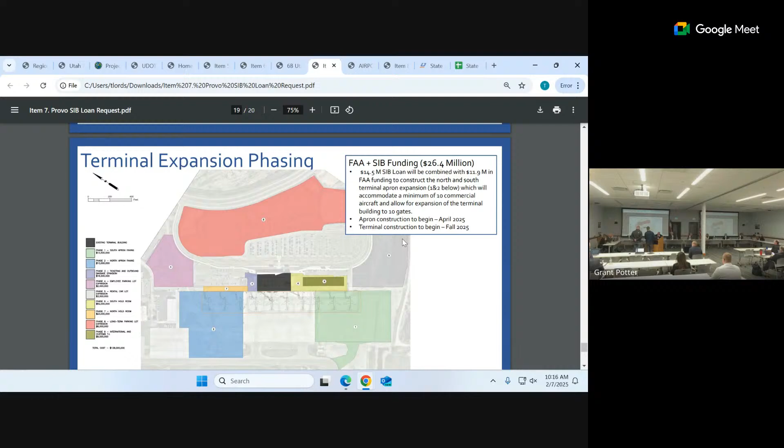Any questions? Go ahead, please, Carlos. Sorry, this will be putting you on the spot a little. Can you go back up a couple slides there, where you showed your cash right there?

So you're going to try to get paving done this summer. Correct. You've got funding coming from various sources. Correct, I'm just trying to give the commission some options here. Can you cash flow the need for the 14.5, taking half of it this year and the other half next year? I know that puts you on the spot, so I'm just asking, do you need it all this year? All is better — we will take whatever we can get, and we're committed to making this project work. So if the commission feels they can only appropriate some of the money, we understand that. We don't want to — we will do what we can. You don't have to bid against yourself here.

My question, following up on Carlos, is whether you have any other sources you can approach — any other lending institutions, Zions Public Finance, or anybody from the state agencies that can give you part of this money rather than all from the SIB loan. Yeah, we are exploring other options as well, whether that's our own internal utility loans from Provo City, or some other options we're looking at.